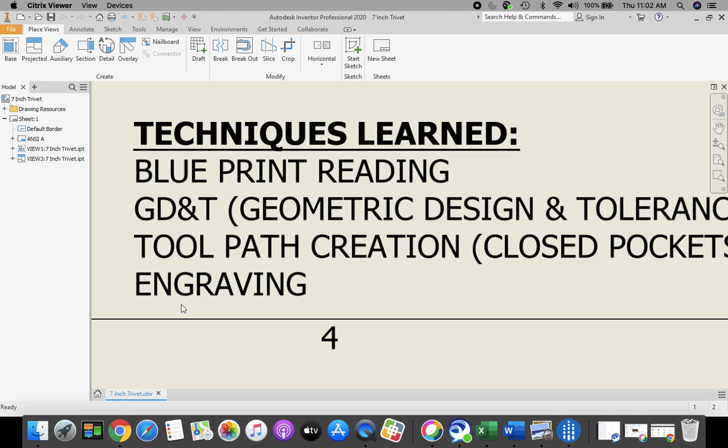You can also view this as a PDF if you want to have it up at the same time. If you take a look down here, what we are going to be working on today is blueprint reading, geometric design and tolerancing, toolpath creation, and preparing it to be laser engraved.

You can see that our overall dimension is 7 inches by 7 inches with a total thickness of 3/8 of an inch, 0.375. These slots that are in here are all 0.5 inches from top to bottom, and the distance between the slots are 0.75 inches.

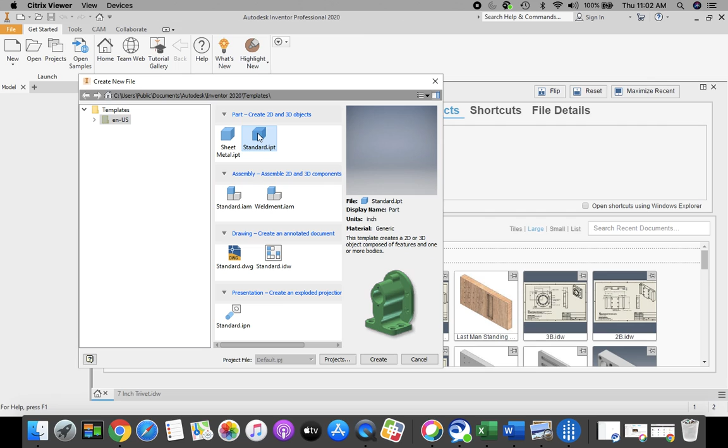To begin, when we're in Inventor, we're going to come up to our top ribbon bar and select new. Then we're going to choose standard.ipt and click create.

Go up to your top ribbon bar, select the drawing with the green plus mark, and as always we're going to choose our XY plane to begin drawing on. When it highlights red, click to select it. Click front in your world view cube in order to zoom out.

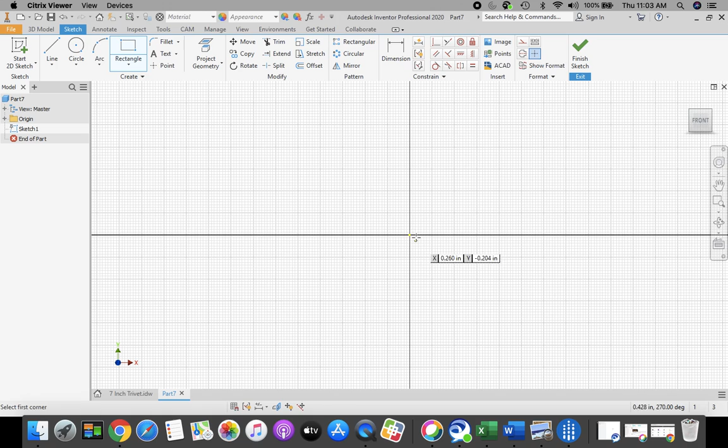To begin, we're going to start with our rectangle tool from the top ribbon bar. Bring your cursor to the middle of the screen. Once your cursor dot turns to green, that means you're on the origin.

We're going to click and stretch out a rectangle to the upper right hand quadrant. We're going to enter in our first dimension of 7. Press the tab key. Our second dimension for vertical height is 7, and press enter on the keyboard.

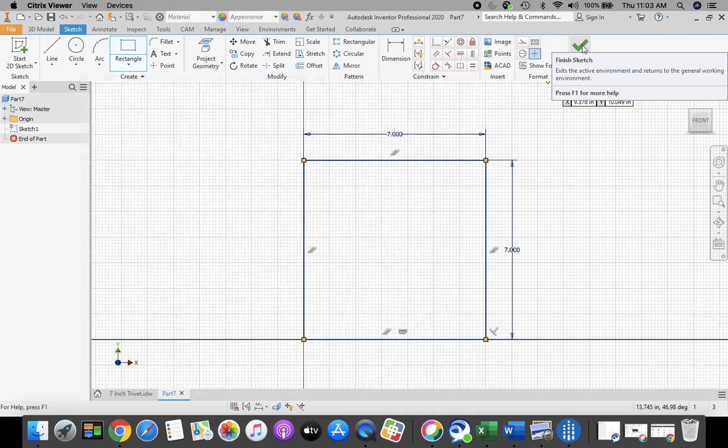Click front in your world view cube to zoom all and see what you have. Now we're going to go up to the top ribbon bar and click the green check mark, finish sketch. Click home in your world view cube to zoom all.

To give our part thickness, we're going to come up to our ribbon bar and click extrude. Remember, we want this to go in the direction that's not coming to us. We're going to flip it, the second button in, and enter in our distance here for how thick that material is. That material is 0.375, 3/8 of an inch.

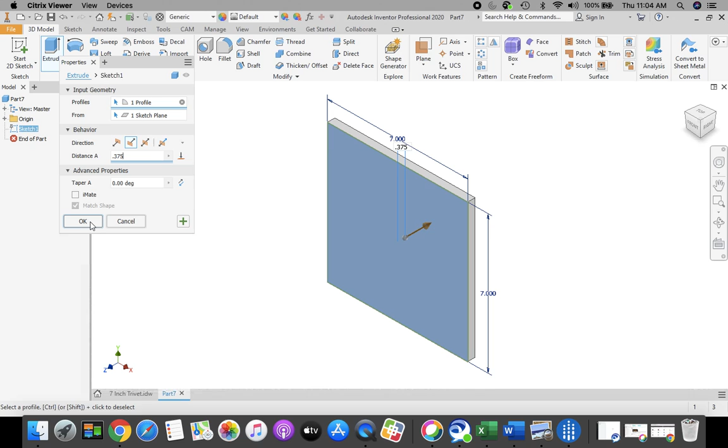Once you have those entered in, click OK. Then we're going to start and begin drawing those slots on there.

We're going to get a 2D sketch from our ribbon bar at the top. Place it on your front view of your drawing. And click front in your world view cube, or you could click on the magnifying glass piece of paper here in order to zoom all.

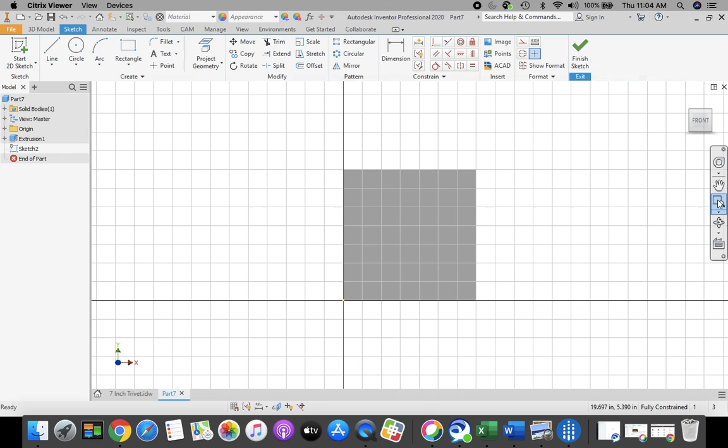Now, this is going to be a little messy with our rectangle, so I'm going to organize my dimensions pretty nicely in here for you.

To start, we're going to go up to the top, get our rectangle tool, and I'm going to stretch out a rectangle. The first distance for this rectangle is 5.5 for the horizontal dimension. Press the tab key, and my thickness for this rectangle is 0.5. Press enter on the keyboard.

Now, I'm going to organize these dimensions a little bit so that you can see what I'm doing with the other ones. Usually I don't put them inside the geometry, I always want to leave them outside, but this is going to get kind of cluttered up if I don't do this for you. Next, I need to dimension the location of this rectangle.

So I'm going to get my dimension tool, and click the bottom of my part and the bottom of the rectangle that I just drew. Bring this dimension out to the side, and this dimension is 0.75. Press enter on the keyboard or the green check mark. Now this dimension moves the rectangle 0.75 inches up from the bottom.

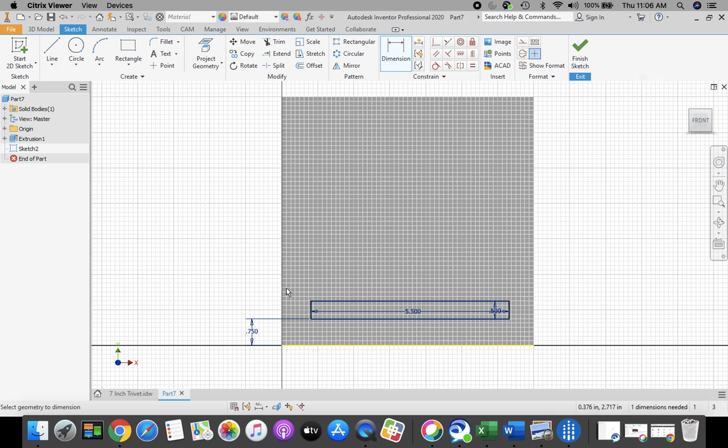Next, I need to tell it how far in from the side it is. So with my dimension tool, I'm going to click the left-hand side of my part and the left-hand side of my rectangle. Bring this dimension down, and this dimension is 0.75, 3/4 of an inch, green check mark.

Next, I'm going to get my next rectangle on there. Get my rectangle tool, and I'm going to draw another rectangle. This rectangle's dimension is 5.5.

Press the tab key and 0.5 for the height. Press enter on the keyboard. Next, we have to dimension this and place it onto the part.

We're going to get our dimension tool. Before I do that, I'm going to move my dimensions inside the part. You can leave yours where they are, although it looks a little cluttered. To dimension the location of this rectangle, I'm going to dimension from the top of my first rectangle to the bottom of this second rectangle. Bring this dimension out to the side, and this dimension is 0.75. They're all spaced 3/4 of an inch apart.

I am going to dimension from the left-hand side of this rectangle to the left-hand side of my part. This dimension is 0.75. Green check mark.

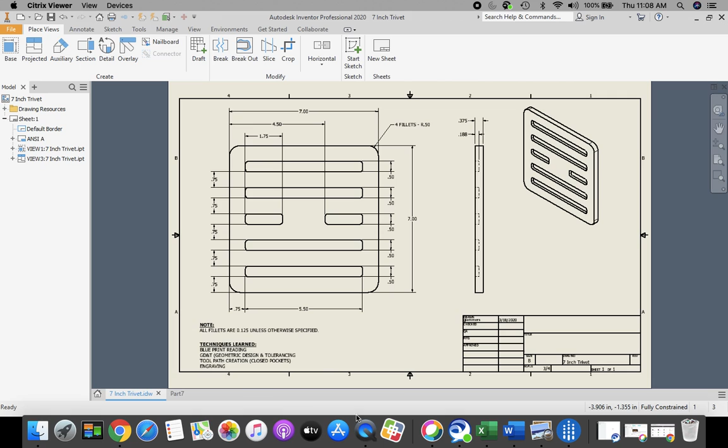Going back to my part drawing, I'm going to choose my rectangle tool from the top ribbon bar and stretch out a rectangle. My horizontal dimension was 1.75. Press the tab key. My vertical dimension is 0.5. Press enter on the keyboard.

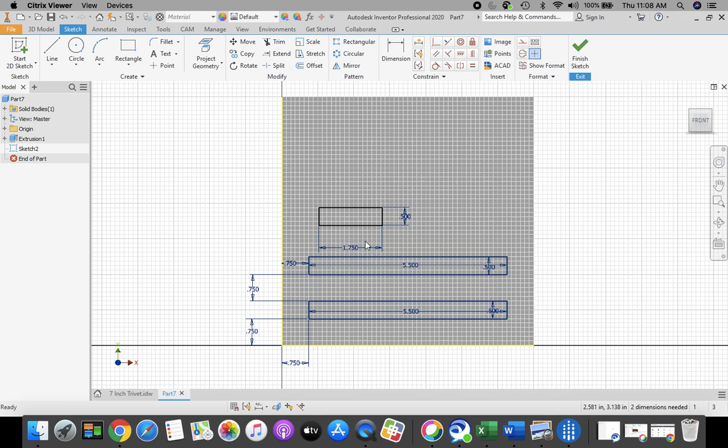I push the escape key and move my dimensions inside that geometry so it doesn't look so cluttered as I'm positioning it. Then I'm going to dimension from the bottom of my rectangle to the top of that second rectangle, so I get a spacing in between these of 0.75.

Now I need to dimension how far it is to the outside edge. I'm going to dimension from the left-hand side of my rectangle to the left-hand side of my part. This dimension here is 0.75. Green check.

Rectangle tool once again for the other narrow one on the other side. Stretch out the rectangle over here, and I'm going to type in 1.75 for the width. Press tab key, 0.75 for the height. Enter on the keyboard.

Made a wrong dimension here. In order to change it, I'm going to click on it, double click on that dimension. It brings up the edit dimension box, and this dimension is supposed to be 0.5 for the rectangle height. Green check mark, and then it changes to the right size.

Once again, I'm going to move my dimension into the geometry so it doesn't look so cluttered. Then I'm going to dimension from the top of this rectangle to the bottom of the rectangle that I just created. This dimension here is 0.75. Green check mark.

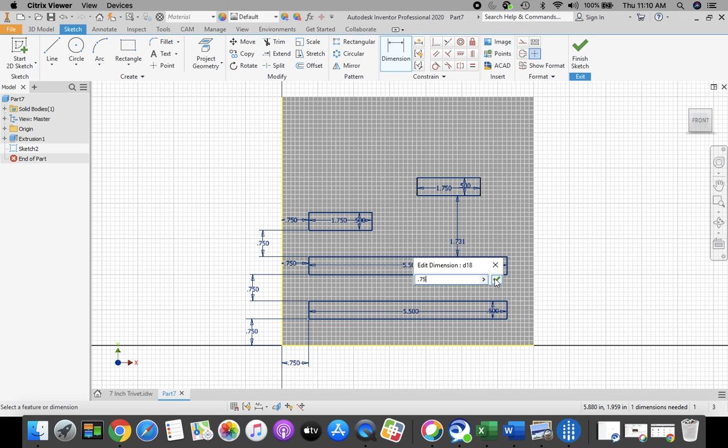I also have to locate this slot or rectangle from the left-hand side and position it correctly. So I'm going to click from the left-hand side of my part to the left-hand side of my rectangle. When the line highlights red, click to select it. This dimension here needs to be 4.5. Green check mark or enter on the keyboard.

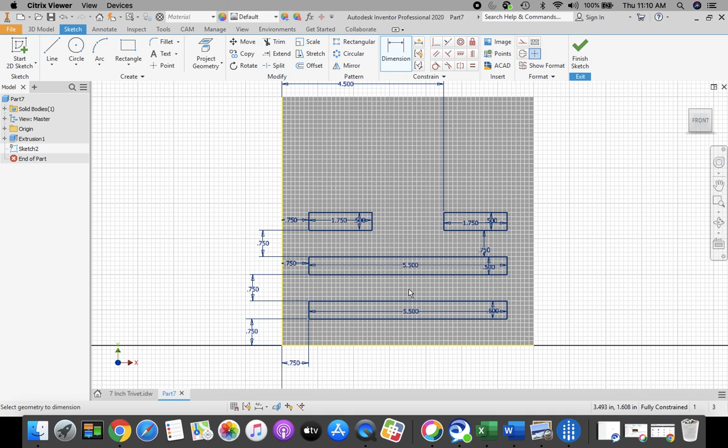Now we have two more long narrow rectangles up here. I'm going to continue placing those on. Rectangle tool, click my rectangle, stretch it out. 5.5 for that dimension. Press tab on the keyboard or toggle to the other box. 0.5 is my rectangle height. Enter on the keyboard.

I'm going to dimension for the location of this. Once again, bottom of the rectangle to the top of this third rectangle. Bring this dimension out. The spacing in between is 0.75.

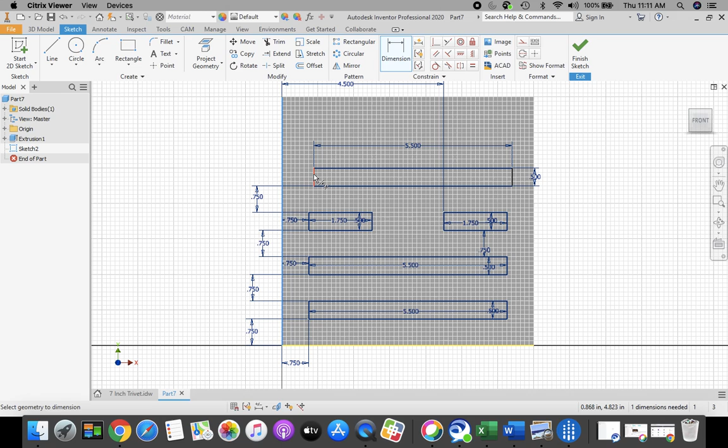I also want to position it from the left-hand side of the part to the left-hand side of the rectangle, and this dimension is 0.75. To make things easier again, I'm going to move my dimensions inside the box so it doesn't look so cluttered on the screen. Then I'm on to my last rectangle.

I'm going to use my rectangle tool, stretch out a rectangle. This rectangle is 5.5. Press the tab key, 0.5 for the rectangle height. Press enter on the keyboard.

I'm going to move these dimensions inside my part so it's a little easier to see. Then I'm going to dimension from the bottom of this rectangle to the top of the rectangle below it. Bring this dimension out to the side. Spacing in between each one of these is 0.75. You see how I'm keeping them all on the same side of the drawing.

Dimension from the left-hand side of the part to the left-hand side of this rectangle. This is also 0.75. Green check mark.

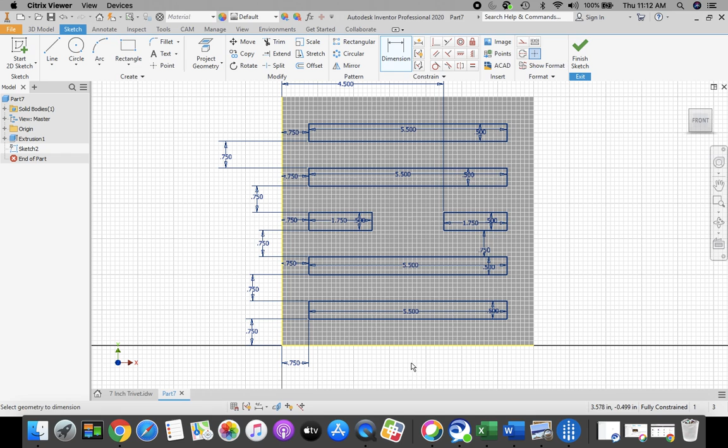Great job with drawing those rectangles. Next, we're going to click the green check mark to finish the sketch, and we're going to give those rectangles depth.

So we're going to click on extrude in our ribbon bar at the top. And I'm going to bring my mouse over and click each one of these rectangles to identify that it needs to be extruded.

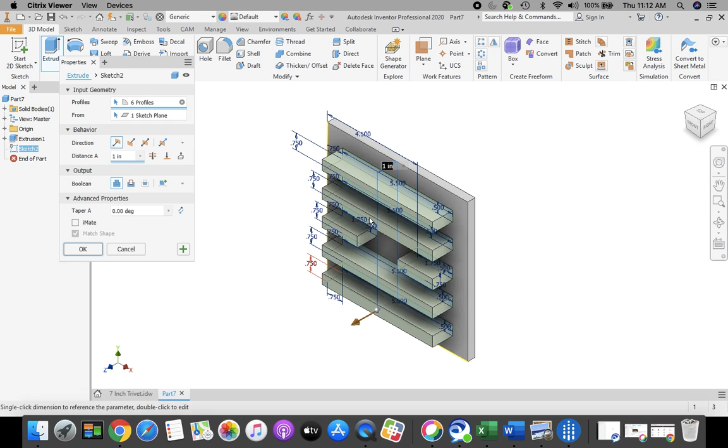Now you can see that they're coming out towards us, so I want to flip that to make sure they're going the other way. Or if I wanted to, I can come down here and choose the cut command. I'm going to highlight my distance and change that depth to 0.188, which is 3/16 of an inch, and click OK.

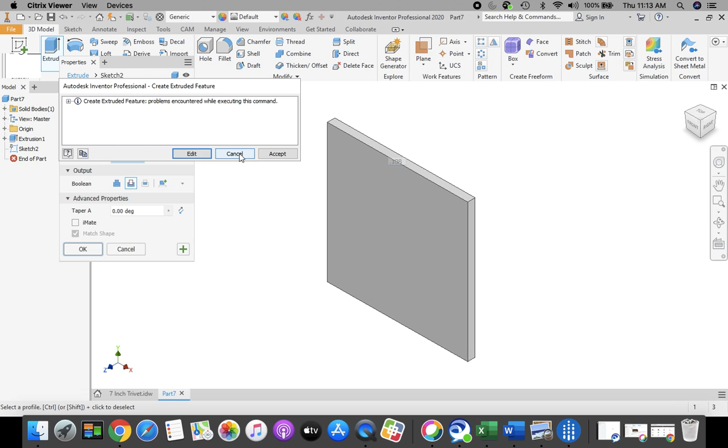If this problem shows up where it says create extruded feature, you're going to press edit. The problem that I have is I have a cut feature, but it's coming out towards me, so I want to change it to flip direction. Then when I click OK, it's going to accept it. So if that happens to you, now you know how to fix it.

So we're going to cut this from the front side, and then we're going to turn it over and cut it from the back side, and that's going to have our milled out part in it.

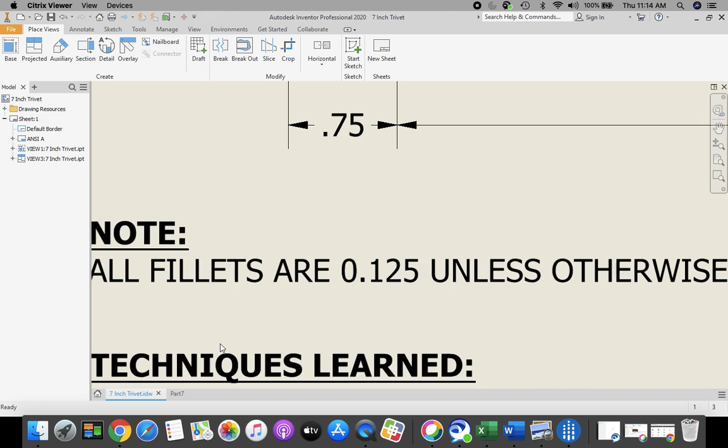The next thing I want to do is place my fillets in here. So I'm going to open up my drawing and take a look at my fillets. Down here in the note, you can see that all fillets are 0.125 unless otherwise specified. However, these corner fillets that are on the outside corners have a radius of 0.5. So we're going to take a look at creating all of these.

Going back to my drawing, I'm going to get my fillet tool from the top ribbon bar, click on fillet. By default it should come in as 0.125 for the radius. And I'm going to come in and select all my inside fillets.

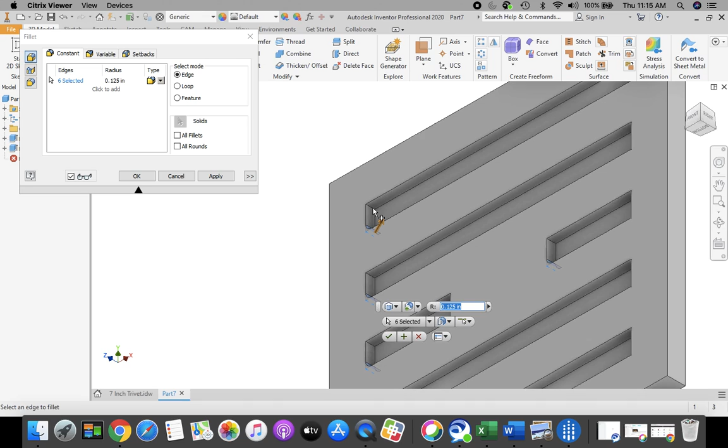It's going to take a little while to get these all clicked and selected. I'm going to use my cube in order to rotate around. So I'm now going to click my bottom part of this cube. That's going to change it so I can see my other ones. Zoom back in, and I just want that vertical line inside of all of these openings.

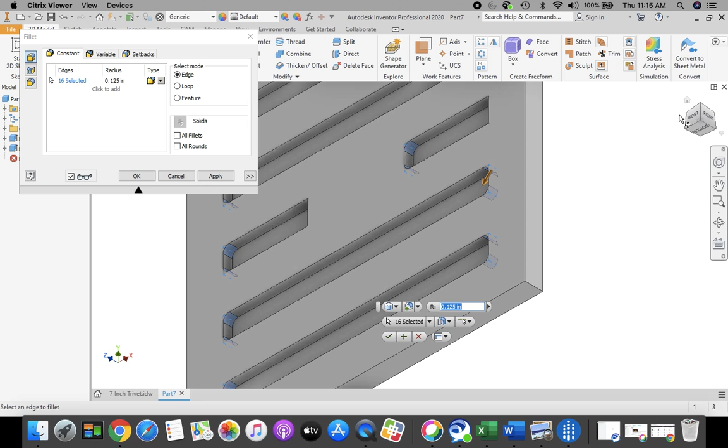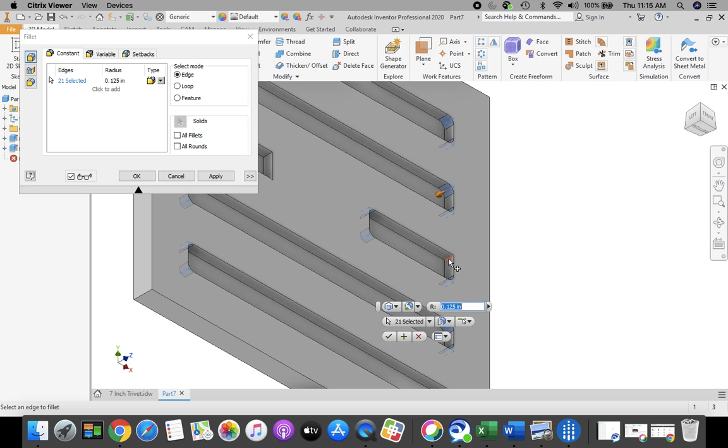If you're pretty good, you can highlight over your part and select that hidden one as well if you're zoomed in on it well enough. If not, a good solution is to go to your World View Cube, click on the opposite corner, and then zoom in, and you should be able to find those edges to highlight as well. And then you'll just have to flip it again to the bottom corner, zoom back in, and then you should be able to find the top edges. If you miss some, it's not a big deal to go back and select those.

Once you have all those corners selected, you can see that they're all highlighted in blue. I'm going to click apply.

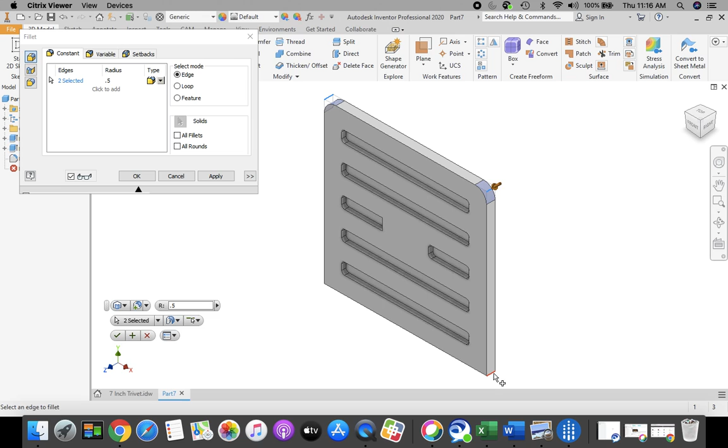Then with my fillet menu still open, I'm going to change my radius to 0.5, and I'm going to select all my outside corners. This one here, you can find that hidden back there, or you can change this and flip it around in your World View Cube to select that opposite corner.

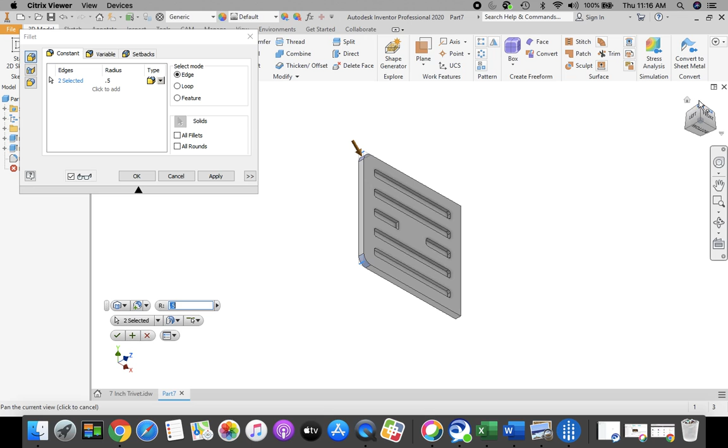Oops, I got the wrong edge. Cancel, not too hard to cancel it and come back in, fillet. 0.5 is my radius. I'll come in, click my outside corners, and that puts that 1/2 inch fillet on the outside. Click apply, click cancel.

Great job on creating your part for the trivet. The next video is going to be how to run the tool paths.

In order to save this, we're going to come up to the top, go to File above our ribbon, the orange file in the upper left-hand corner. We're going to go down to Save As. We're going to make sure that this is going into our H drive, first initial last name 000. If it's not, you want to click on the pull-down menu and go down to your H drive, first initial last name 000, which should be the bottom of the list.

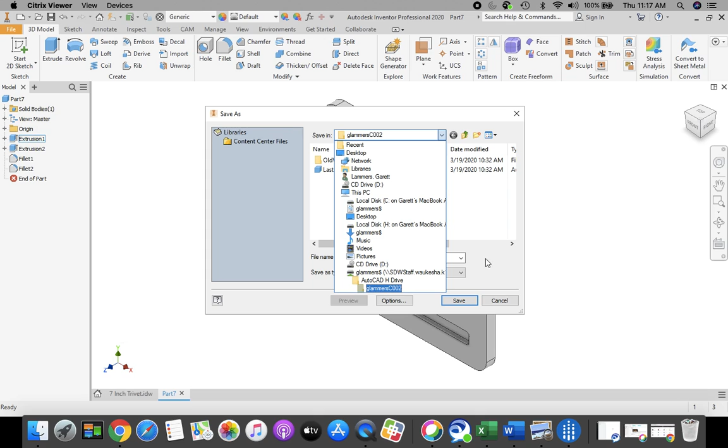Once you have that selected, we're going to change the file name to Trivet and then enter your last name. So Trivet and your last name, and click Save.

Congratulations. The next video is going to show you how to run the tool paths.